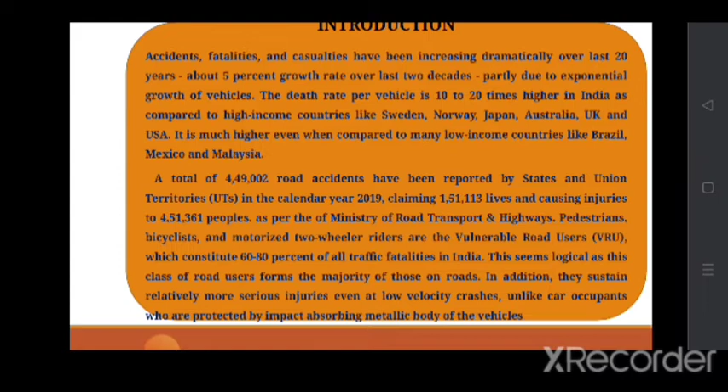Accident fatalities and casualties have been increasing dramatically over the last 20 years, about 5% growth rate over the last two decades, partly due to exponential growth of vehicles. The death rate per vehicle is 10 to 20 times higher in India compared to higher income countries like Sweden, Norway, Japan, and Australia. It is much higher even when compared to low income countries like Brazil, Mexico, and Malaysia.

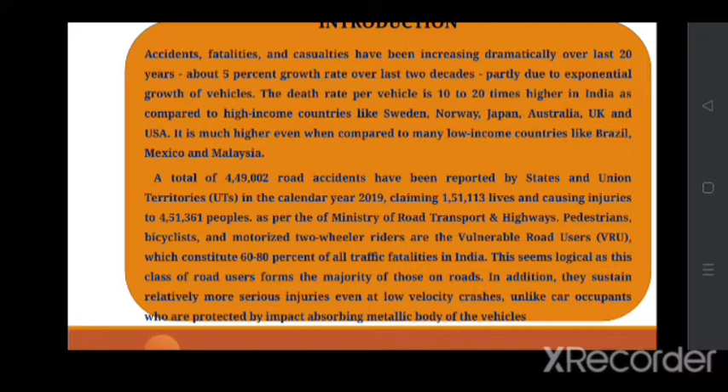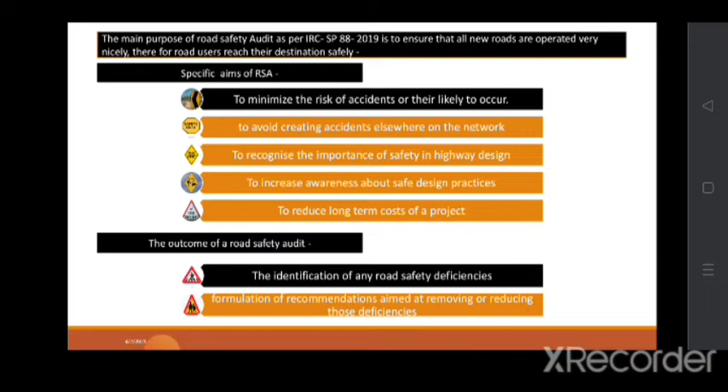The main purpose of road safety audit as per IRC SP 88 2019 is to ensure that all new roads are operated very nicely, so that road users reach their destination safely. The specific aim of road safety audit is to minimize the risk of accidents where they're likely to occur. The outcome of road safety audit is the identification of any road safety deficiencies.

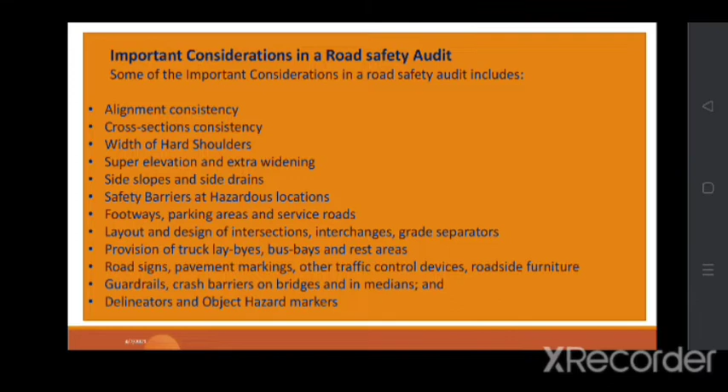Important considerations in a road safety audit: alignment consistency, cross section consistency, width of hard shoulders, super elevation and extra widening, side slope and side drains, safety barrier at hazardous locations, footways, parking areas and service roads, layout and design of intersections, interchanges, grade separators, provision of truck laybys, bus bays and rest areas, road signs, pavement marking, other traffic control devices, roadside furniture, delineators, object hazard markers. These are the codes that are primarily referred to.

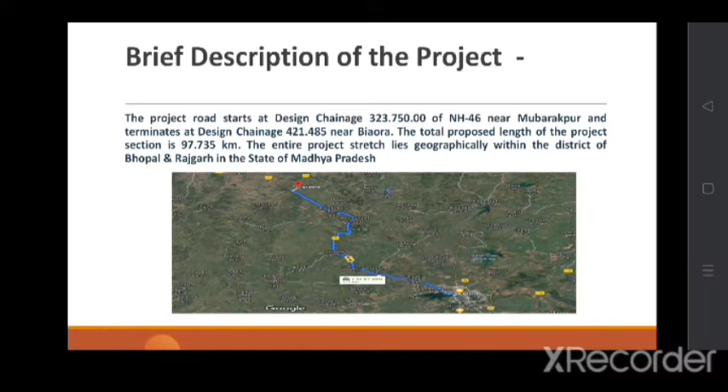First we are doing road safety audit at the design stage: findings and recommendations. This design was provided to all participants of the training, and from that they found out these safety concerns and recommendations.

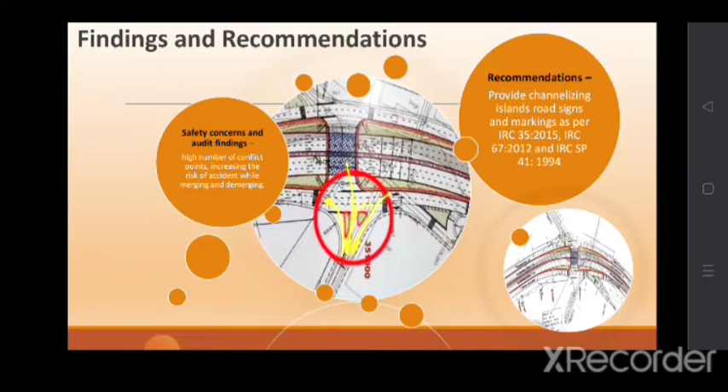The safety concern here is the high number of conflict points, increasing the risk of accidents while merging and diverging. In this smaller photo there were no channelizing islands, which is why there were higher chances of collisions. The recommendation made is to provide channelizing islands, road signs and markings as per IRC 35 2015, IRC 67 2012, and IRC SP 41 1994 respectively.

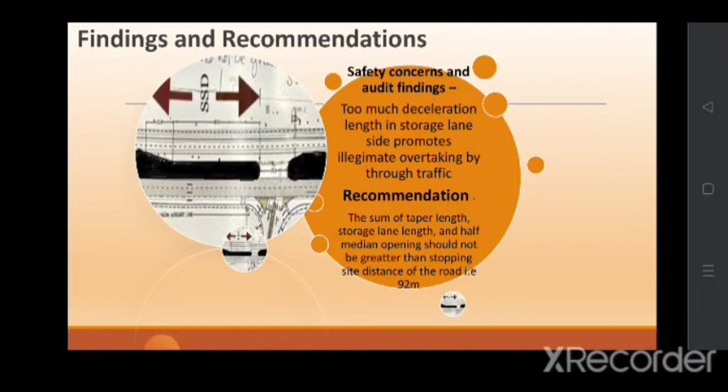Another safety concern is too much deceleration length in the storage lane. Storage lanes are provided in the median, where some people want to change direction on 4-lane roads, so too much deceleration length is a big safety concern. The recommendation is that the sum of taper length, storage lane length, and half median opening should not be greater than the stopping sight distance of the road, that is 92 meters.

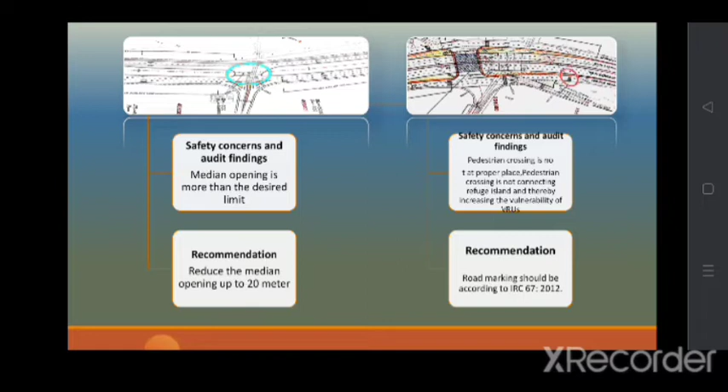In this one we saw that pedestrian crossing is not at the proper place. Pedestrian crossing is not connecting to refuge islands, thereby increasing the vulnerability of VRUs, that is vulnerable road users. The recommendation is that road marking should be according to IRC 67/2012.

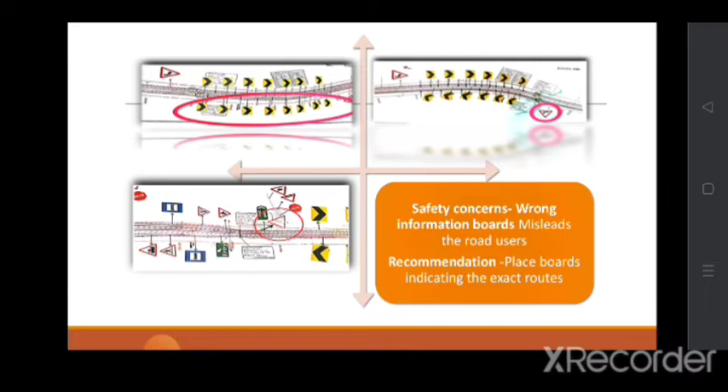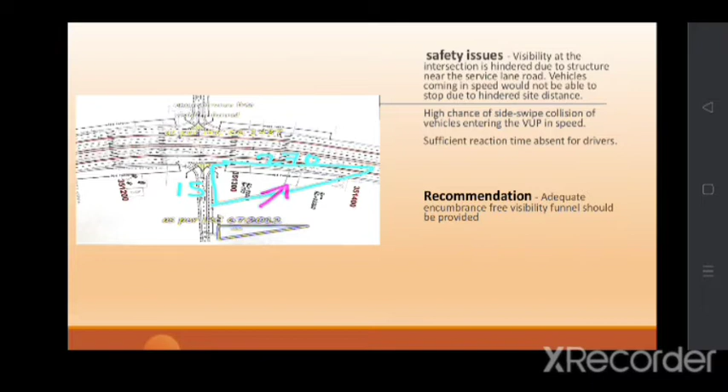In the same way, these signs are not properly shown in this design, along with other types of markings. Here we can see the issue is visibility issues. The funnel visibility has to be given according to IRC 67/2012.

There are more findings and recommendations that you can see in this presentation.

Some more findings. Now, findings in this cross section.

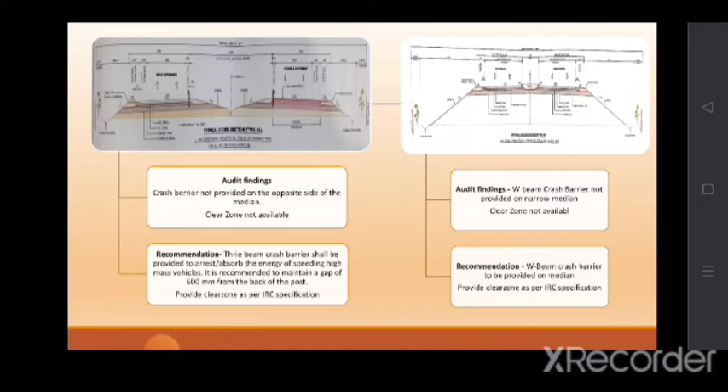Some more findings. You can refer to these findings and prepare your own design stage audit report. Most of the time the mistakes are same in the designs, and you can refer to this presentation.

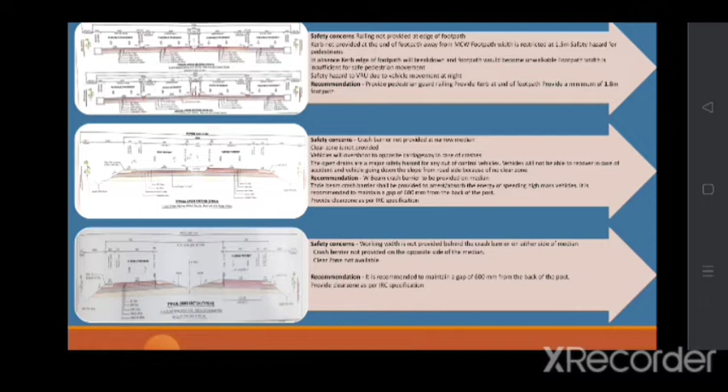Now, road safety audit at existing stage. We know we need to do four different types of road safety audits: one at design stage, then at existing stage, at construction stage, and at night time. So we are going to show you the road safety audit that we did in this training at existing stage.

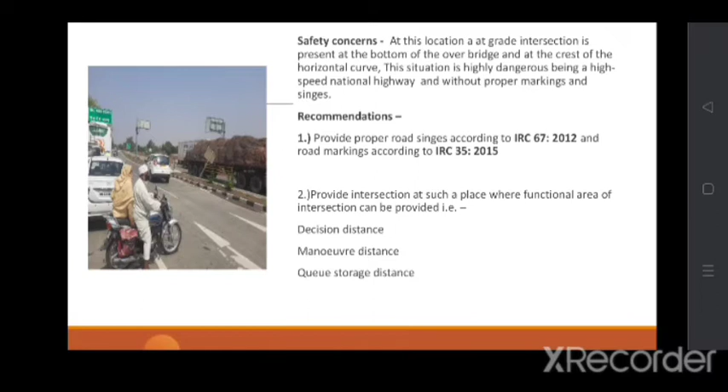In the same fashion as earlier, we first looked on site for safety concerns, and recommended what changes should be made to make our roads safer, and what codes we can use. Again, IRC 67 and IRC 35/2015 for markings. Some more findings, and new codes we referred are IRC SP 41 and IRC SP 103/2012 for junctions and channelizing islands. For median and hazard markings, you can refer IRC 67/2012.

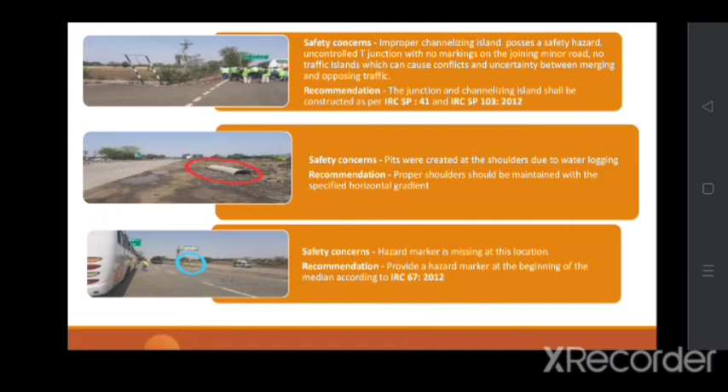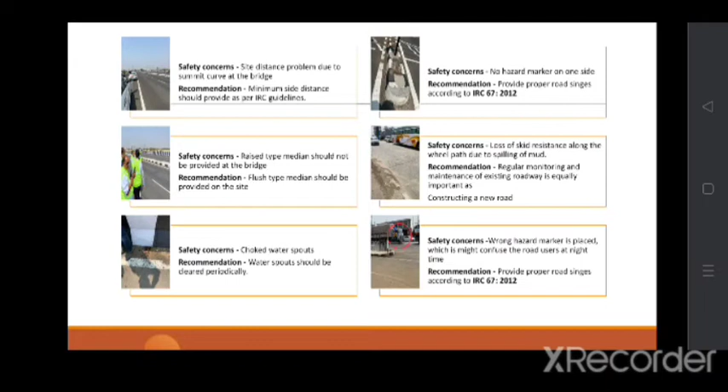A few more recommendations. Mostly these are very basic and simple safety concerns, but they are very important when it comes to road safety of road users, because any minor mistake can cause a fatal accident due to high speed of road users and the advanced road network. So we need to see minor details and recommendations, which you can refer to and read.

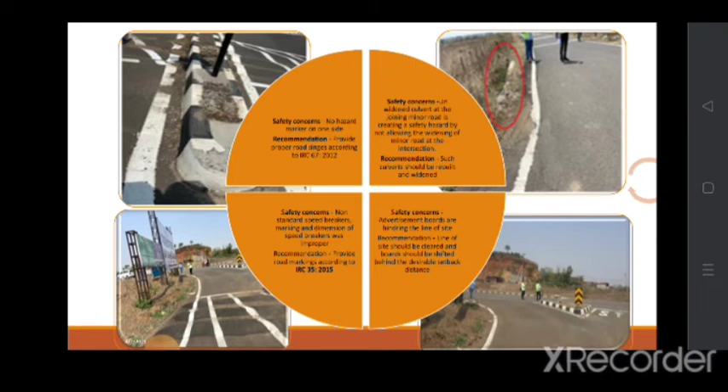We have done this road safety training properly and listened to all the PPTs of those experts. In the left bottom corner we see a road safety concern: non-standard speed breakers, visible in the photo itself. The recommendation is to provide road marking according to IRC 35/2015. There are a few more such findings.

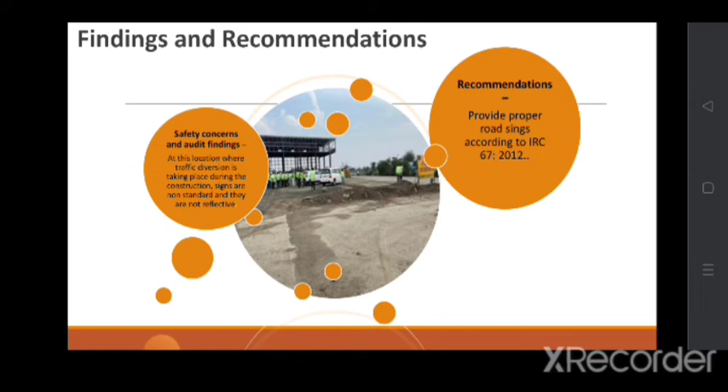Now we can see road safety audit during construction stage. At this construction site, no traffic diversion is provided where construction is going on, and traffic is running on the road without any proper diversion. They need to provide it according to IRC 67: 2012. We can also see an unprotected foundation, showing how vulnerable road users are in such conditions.

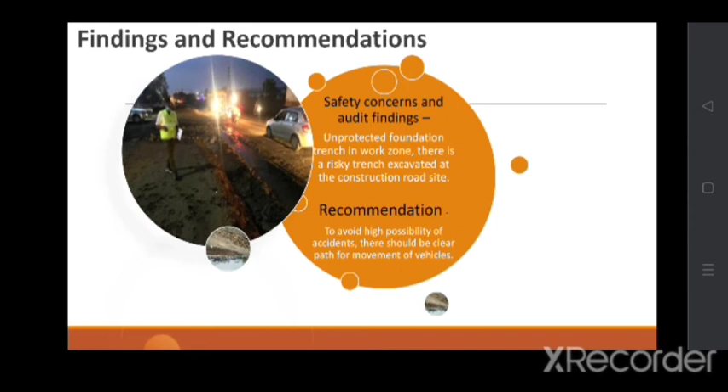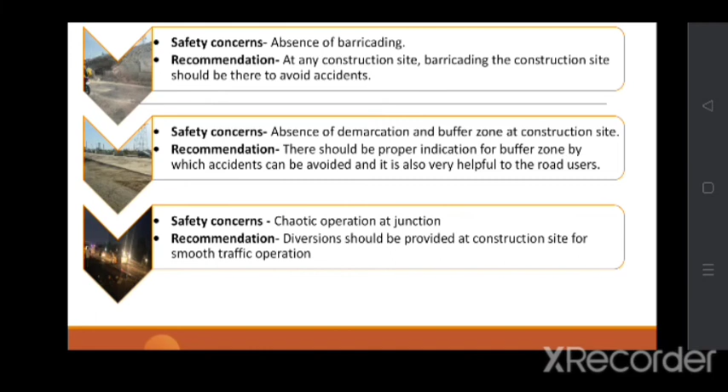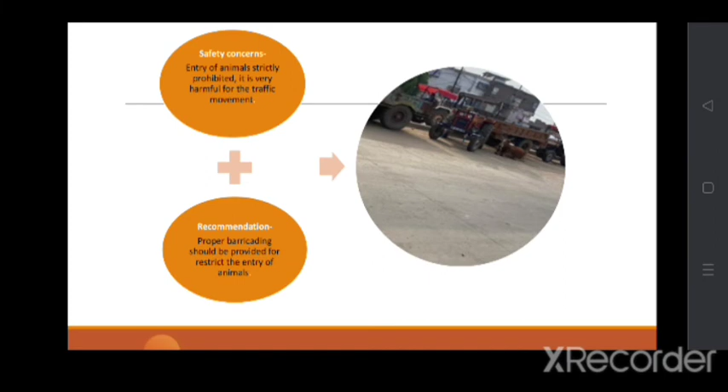Here again we can see safety concerns, a few more, and a lot more safety concerns. This PPT can help you prepare your own PPT. You need to go through all these safety concerns. Just pause the video and you can see them.

Now, road safety audit at night time. What issues could we identify at night time? Road safety is a very wide topic and you can always learn more; there is no limit to this knowledge. This is not actually night time, but we can see we require lighting at this low level of natural light, so we started our nighttime study from this point.

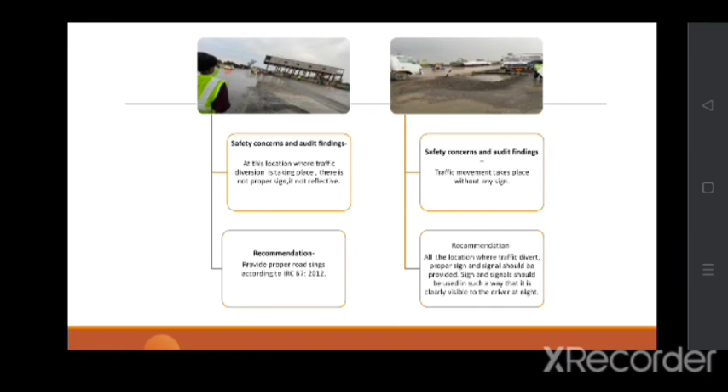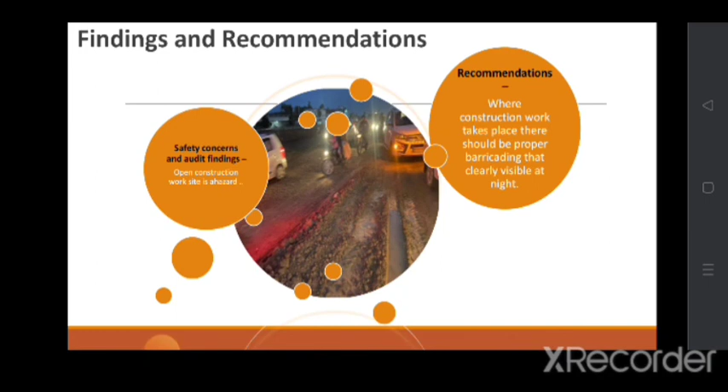We can see an open construction site hazard without any proper diversion or barricading, without any delineated barricading, which is a potential hazard at night time. There are a lot of safety concerns that you can see and read on this page.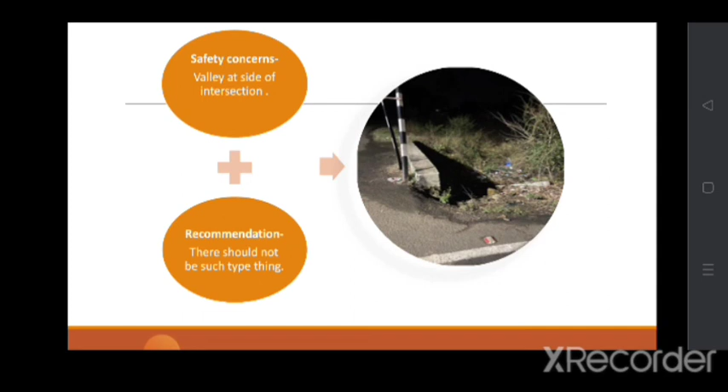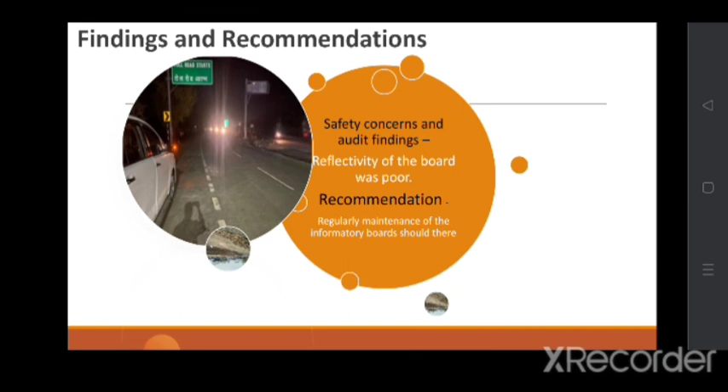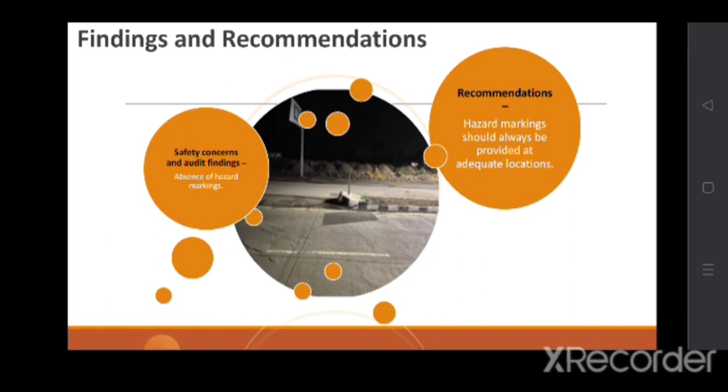Valley at the side of intersection - we can see there should not be such a thing. Reflectivity of the board was poor, so they need to change these boards over time if they are losing reflectivity due to sunlight, or in the absence of hazard markings. Most of the issues are related to visibility only, so you need to focus on how visible and safe you can make the road.

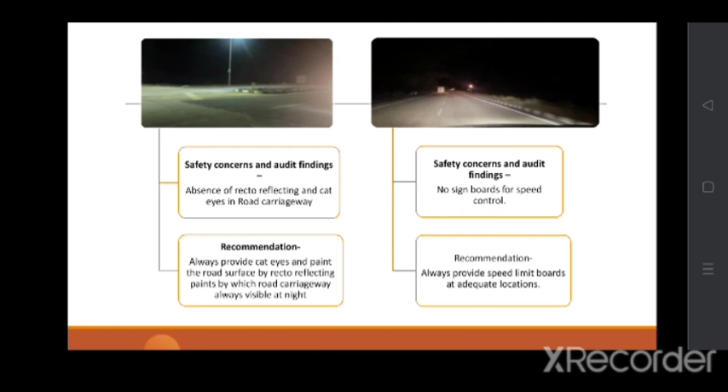Absence of retro reflectors and cat eyes on the road carriageways. There are a lot of safety concerns you can refer to. Thank you.